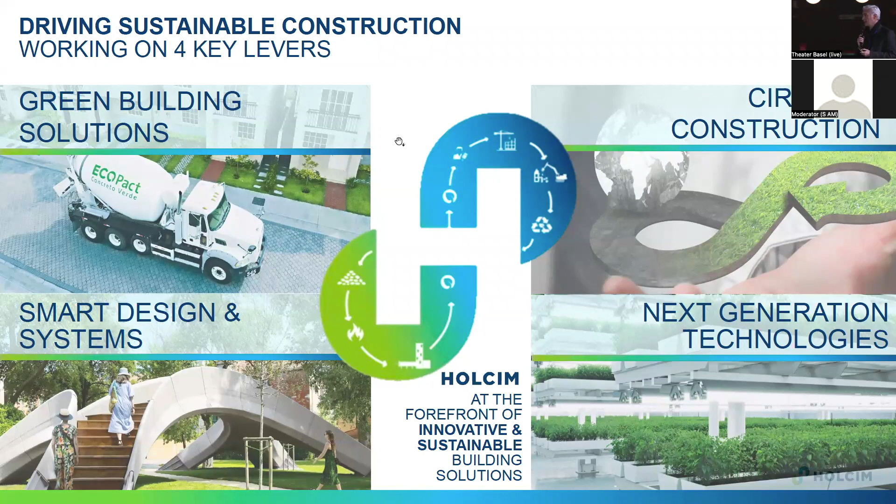And I will come back to that. Smart design and systems - we need to change the way we think and design buildings in order to adapt and face the four facts we already mentioned. And next generation technologies - we need to adapt and take into consideration the way we are extracting data, generating data, and extrapolating and modeling the way we build. So I would like to spend a few minutes on each of the four pillars I'm mentioning here.

The first one is green building - low carbon solutions on cement and concrete. We need to redesign and rethink the way we produce cement. We need to replace the clinker, which is a raw material for cement production, so we need to minimize the use of clinker in the cement formulation.

And then we need to use alternatives, be it slag, fly ashes, pozzolan, or other natural resources or waste materials that exist today and are to be used anyway for cement production. I'm just mentioning two products launched by the Holcim group, which is leading in this green solution, providing a broad range of green cement and concrete with CO2 decarbonization ranging from 30% to 100%. That's our way to decarbonize the cement and concrete industry.

Products that have already been used - we are not inventing something for tomorrow, we are already using these products today. A few examples: in Seattle with the Spheres, very iconic, very beautiful, with a reduction of CO2 of 80%. That's a building done for Amazon, and it's quite nice. It's very iconic, leaving freedom for architects to think differently and make something very nice and cool with concrete.

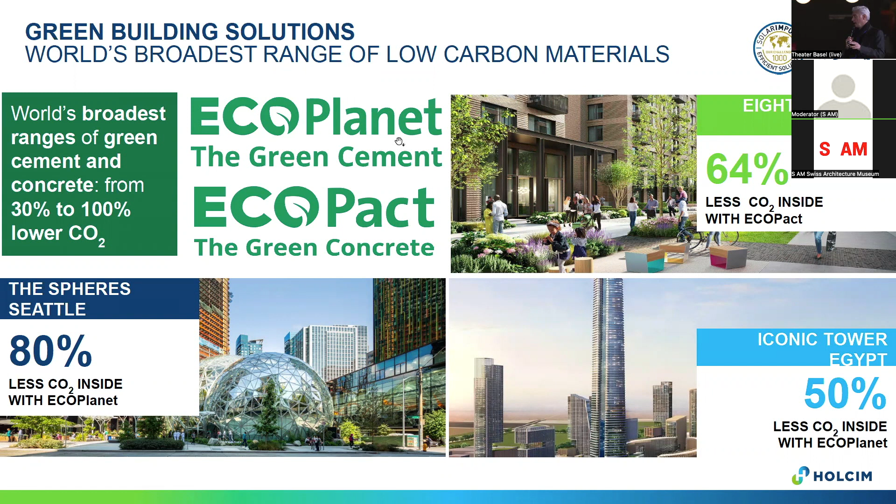The second lever I mentioned is very much about circular construction. We are all generating a lot of waste everywhere, and we need to get rid of it. Today, the cement and concrete industries can cope with this waste, either using it as an alternative fuel or reusing it in our own products. Concrete demolition waste is recyclable - we recycle it by using it as raw material for the cement industry or concrete industry, simply reusing it as recycled aggregate.

The best example we have today is in Switzerland, in Zurich, with the Susteno brand - a cement containing 20% recycled aggregates, crushed and made part of the cement together with the raw material, the clinker, that I mentioned before. That's unique - something that doesn't exist anywhere else in the group. We started with the Swiss model, and we're now replicating this Susteno brand with concrete demolition waste all over Europe and then the rest of the world.

Other examples: digital material management, making sure the available information about recycled aggregates and concrete demolition waste is well known by all users, so they can easily access this material. Advanced crushing technology - imagine that tomorrow, instead of just having recycled aggregate, we can separate the aggregate, the paste, and the cement. Then you can have better access to sand, and we know sand is scarce in some areas. We can get very clean aggregate, replacing natural resources and conventional aggregates.

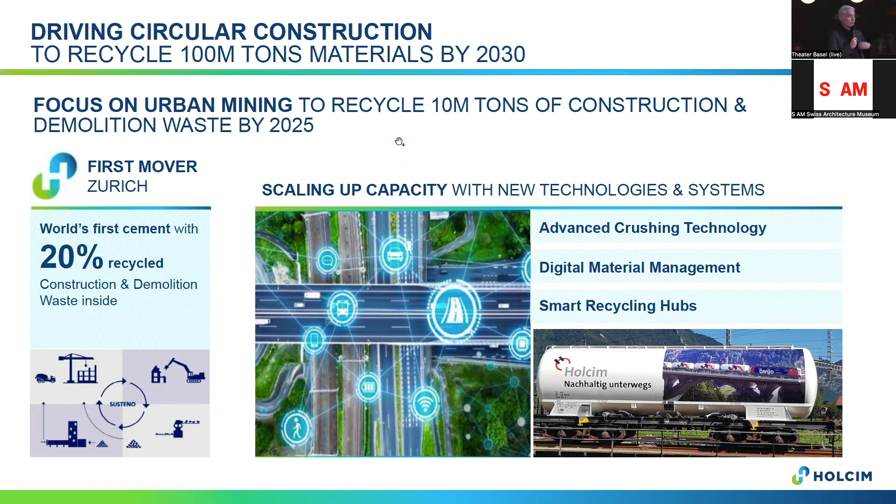Smart recycling hubs are about how to get access to these recycled aggregates more easily and make them available for everyone. This is a key trend, with an objective to reach 100 million tons by 2030. Among those 100 million tons, we want 10 million tons to be concrete demolition waste reused in our industry as recycled aggregate or material for cement.

Obviously, making products low carbon is a solution, but having a design that by definition uses less material, with material at the right place and the right composition, is extremely important. That's what we did with the Striatus bridge, exhibited at the Biennale in Venezia, Italy - a bridge made of 53 blocks, all different, designed and produced by 3D printing, empty inside. That's a wall, and then they all combine - not glued, but just combined together by gravity - which makes them extremely unique, recyclable, dismantleable.

And reusable again. So, having by design this spirit of already anticipating that it will either be reused and dismantled, or recycled, optimizing the use of material over its life. The second example is the lightweight floor system that Philippe knows extremely well, which simply puts the material at the right place and not more.

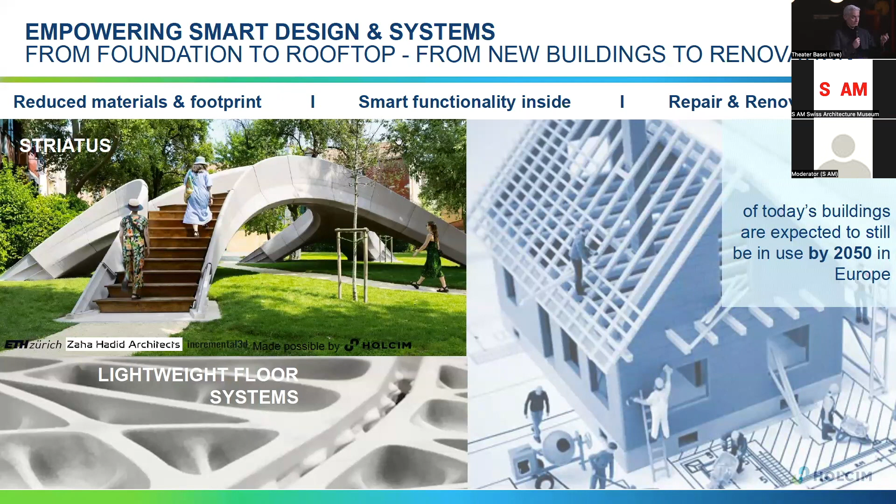Obviously, repairing and renovating is the best way to lower the carbon footprint - not to demolish and rebuild, but to avoid demolition and extend the shelf life of a structure by renovating. We know that 80% of the buildings built today will still exist by 2050, so renovation and repairing will be a key part of how we lower carbon emissions by avoiding new construction.

The fourth pillar is new generation technologies - how can we define new ways of avoiding CO2 emissions by making sure the CO2 at the chimney of the cement plant is captured rather than emitted. That's what we call CCUS: carbon capture, utilization, and storage - how can I reuse the CO2 emitted from my chimney into something new, not just avoiding emitting it into the air, but reusing it for synthetic fuel production, or even crop growth in vertical farming, as we do in Andalusia, Spain. How can I make use of the CO2 emitted from my chimney to produce something, instead of just letting it go into the clouds?

Timber Roc is a perfect combination of wood, taking the benefits of wood combined with cement - using cheap wood to replace the aggregates, combining these cheap woods with cement to make a new kind of concrete, which is carbon negative first, and leads to the same functionalities as a conventional wall.

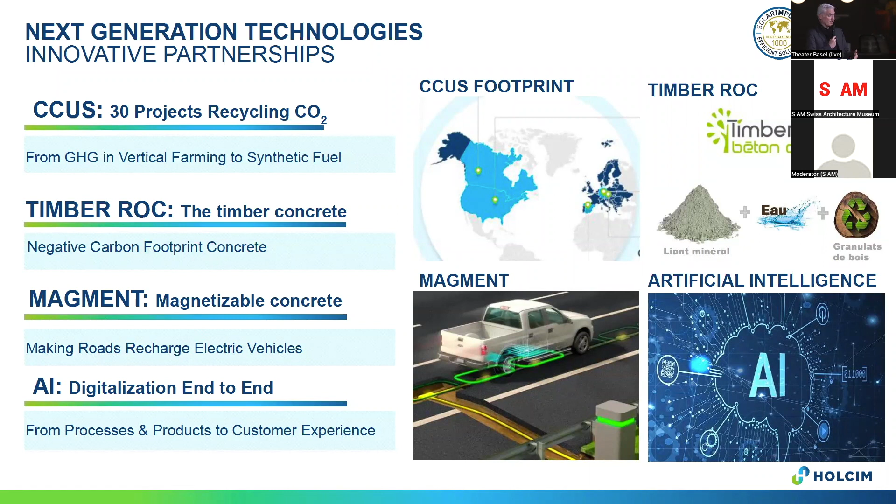And the last one, artificial intelligence. We're generating a lot of data, you are generating a lot of data - how can we extract the most from this data in order to generate lower carbon production, a process of making cement, a process of making concrete, a prediction or modeling of the performance of concrete by using all this data. That's the key challenge for the coming years, and we really need to be ready for that.

Obviously, we want to lead this industry to the net zero transition. We have to be prepared for all the areas of application where concrete is absolutely needed - be it for housing for all, making houses with a lower embodied carbon footprint, or green infrastructure. Here you can see a fantastic example of reefs of bioconcrete, made with 3D printing, that will be placed in the sea and will restore the fauna and flora in the maritime environment.

Industrially, we're building a lot of industrial facilities worldwide, be it logistics or energy systems, and we really need to answer to these needs. And obviously circular cities - making sure we are improving the way we define the circular dimension of every single city that is built.

So all in all, the message here - and I will be extremely happy if at the end of this presentation you keep this in mind - is that we are building and leading the industry towards a net zero transition, a transition that has to be known first by you, because you will be deciding the way you want to build. You have to remember that low carbon solutions are not something for the future - that's something which already exists. We have to make it aware - this is our job. We're making that aware with events like this one, just to have you consider that concrete is not something from the past, but we're moving to something which is low carbon and, in the future, absolutely net zero.

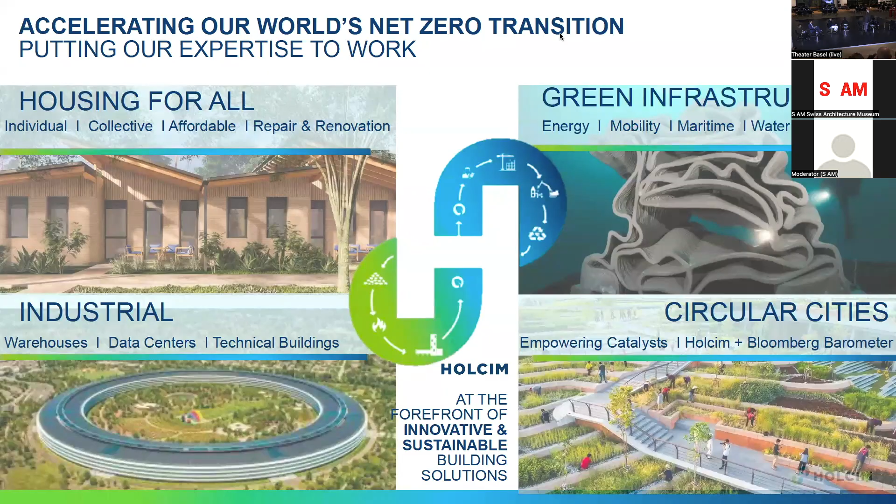All right, thanks for this opportunity. Sorry for bombing the program, but after we talked, Andreas, you said it sounds like you have to present as well - so thanks for that. All right.

All right, I will be talking about rethinking concrete construction, and more specifically, I want to demonstrate what you can achieve by strength through geometry and also by material effectiveness. I'm not talking about material efficiency, so you will see that this is different.

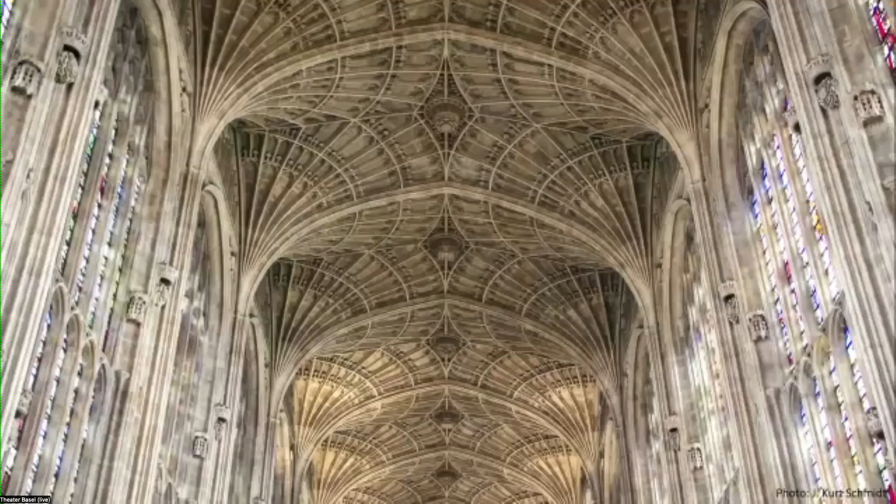My work starts by researching historic structures, and the more you actually look at them, you're entirely blown away that modern day tools can barely understand, explain, or design how and why these beautiful structures still stand, particularly when you realize that they're proportionally as thin as an eggshell.

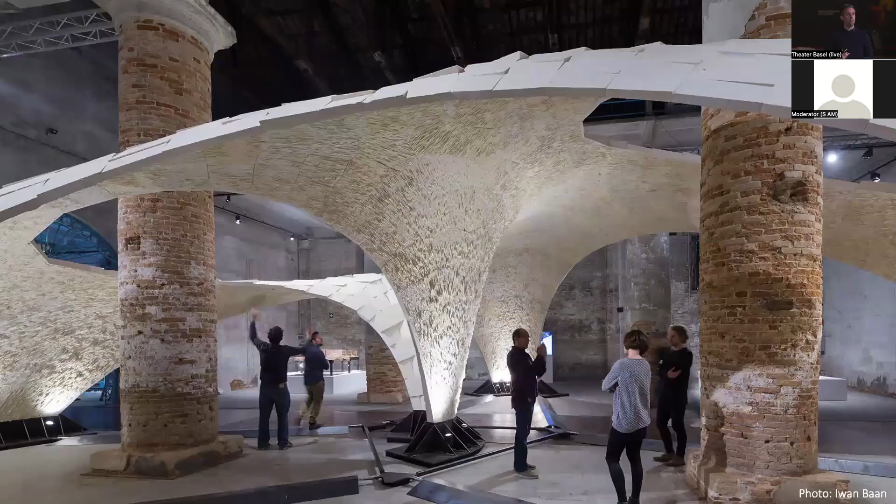So in order to share that message, in 2016 we tried to shake the community a bit, our profession, to show such a structure: 399 cut stone pieces held together by geometry. They get strength through their geometry. There is no glue, no mortar, no reinforcement.

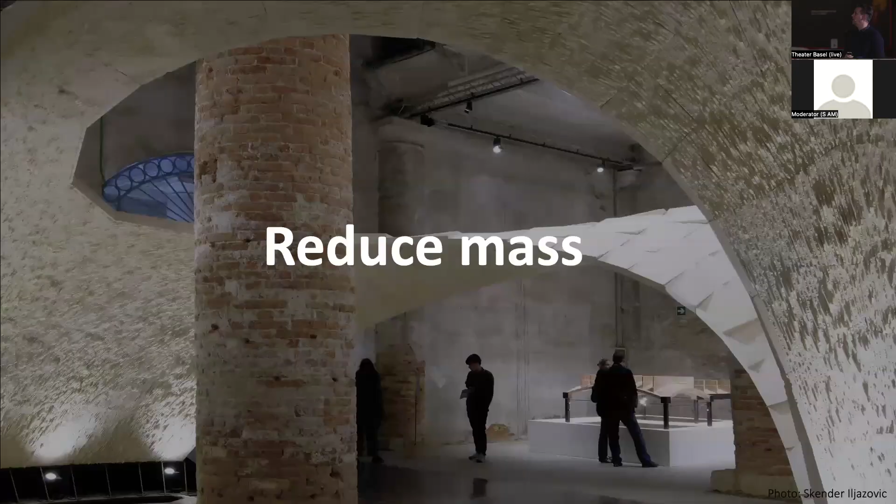So this extremely thin sheet of stone, why I showed you this project, you will see this all come together later. But the key thing is that by reintroducing good structural geometry, you can reduce mass.

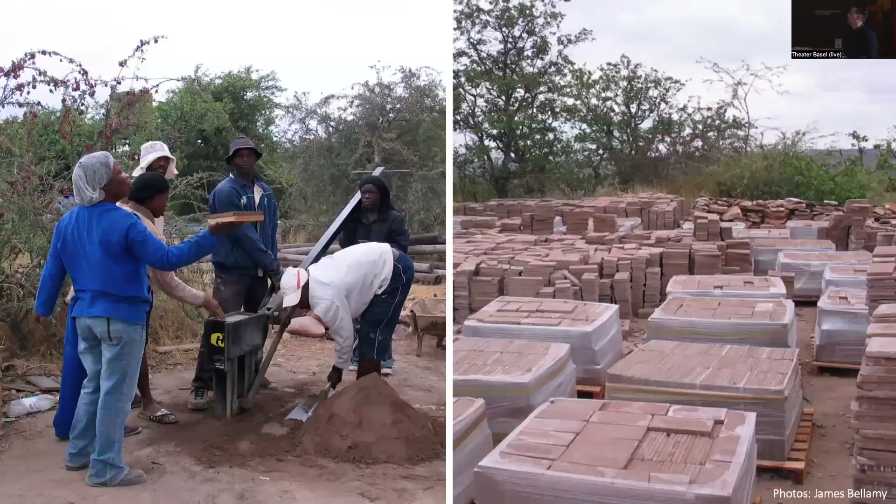Another old project that I was lucky to be involved with is the Interpretive Center in Mapungubwe, South Africa. What is special here is another advantage of getting the geometry right. We used extremely weak materials, so weak that they had to be brought on site in very small packages, or you could just break these elements.

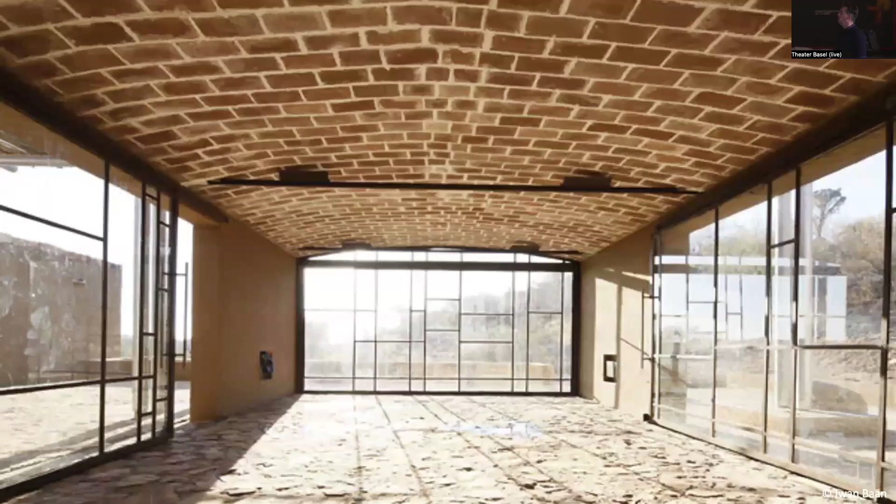But if you see on the left, if you place these weak, non-structural materials where the forces want to go, like people historically understood, then it's a perfectly safe structure that carries the floor still today.

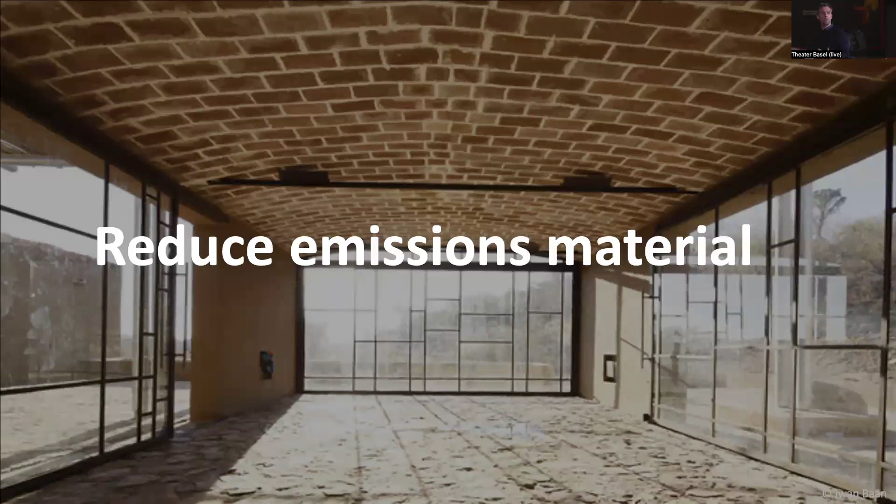So the key message here is that you not only can reduce the volume, but also reduce the stresses. And there is almost a one-to-one relationship between how much you're asking from a material and how polluting it is. So that is the important message here.

So we heard about this. We have quite a challenge as a profession ahead of us, a gigantic world population increase. Typically, you hear about the equivalent of building one New York City every month for the next 40 years. Another calculation is that we are expected to build about 200 billion square meters of floor area in those next years.

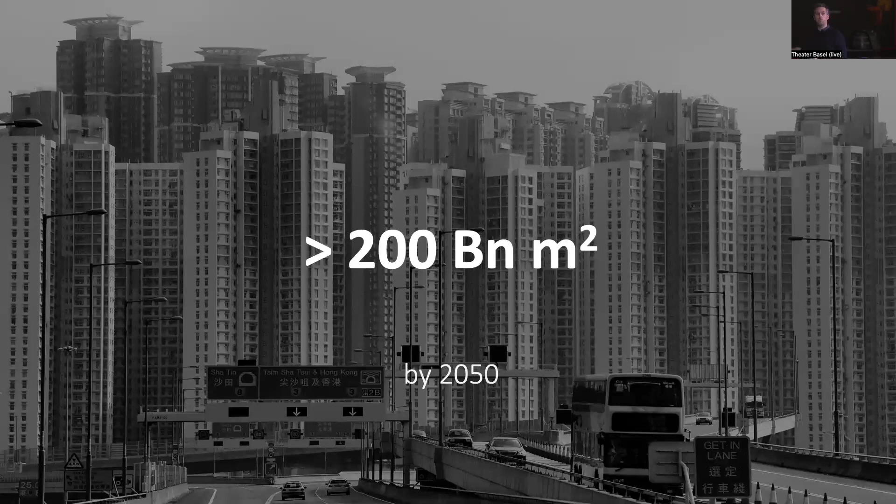So looking at these buildings, we most likely will densify. We will go a little bit higher. I'm not suggesting that this is the future, but let's take any of these buildings.

What is remarkable, if you look at medium high-rises, is that three-quarters of the mass of those buildings is in the structure. A totally crazy situation—the structure is mainly there to keep itself up.

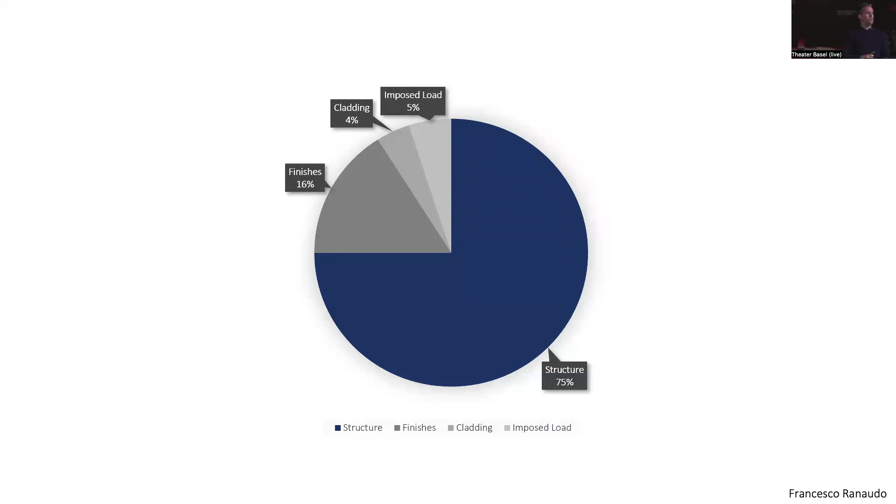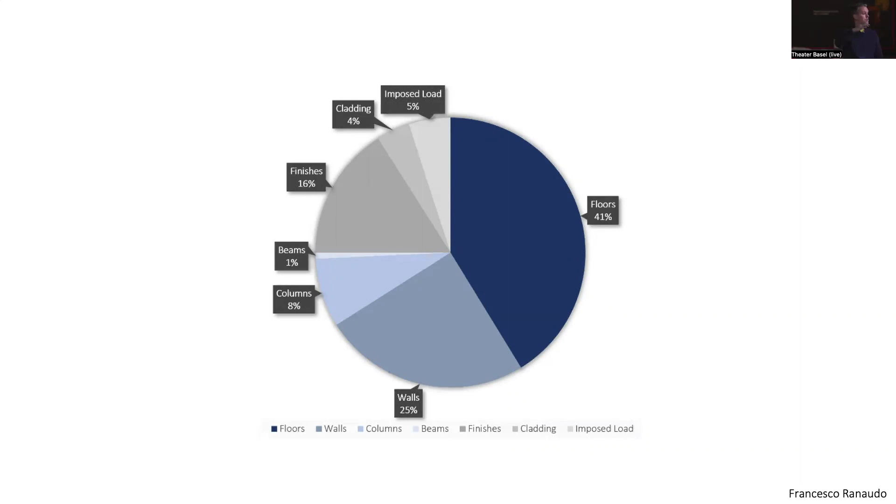And if you then zoom in a little bit more, you see that actually more than half of that structural mass is in the floors. So spanning space, providing the most banal thing to walk on that we all need in buildings, is actually the most material-intensive component.

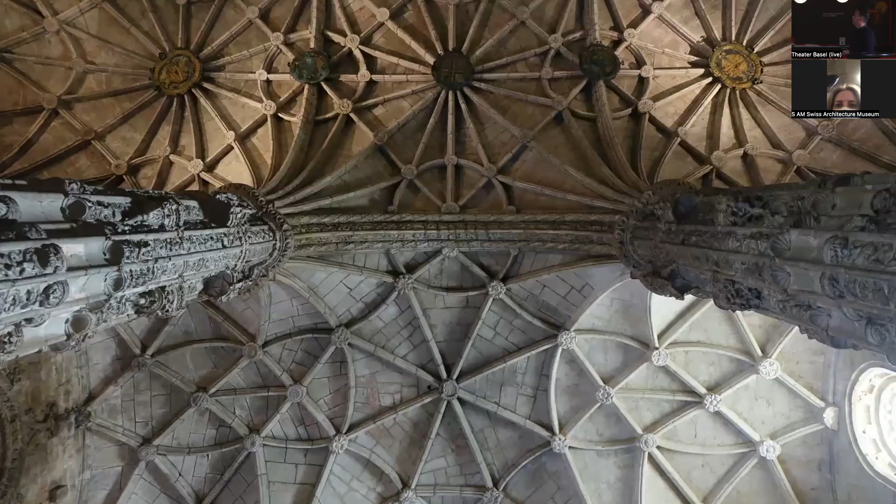That is why we are now recently translating these ideas to address this big challenge. Can we do something better? You probably can imagine where this is going.

I consider concrete—so we also need to distinguish concrete versus reinforced concrete—but concrete is like an artificial stone. Stone is happy in compression, not in tension. That is why these structures are all vaulted arches and so on.

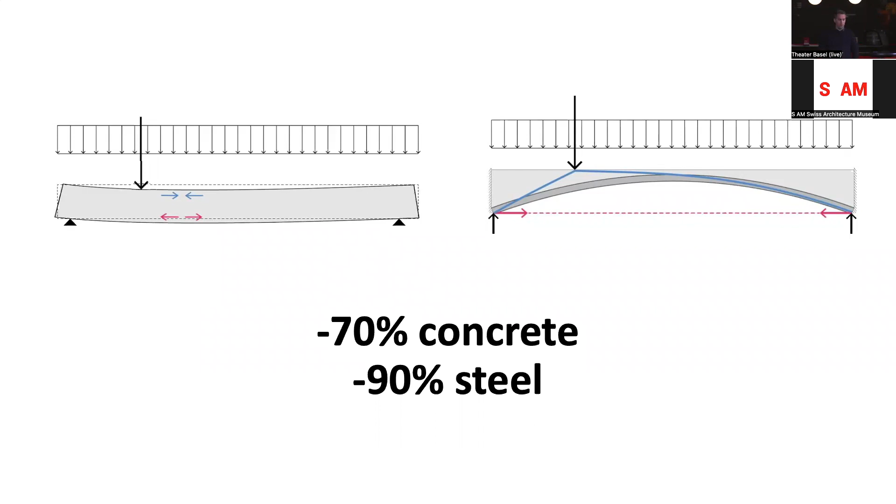So indeed, if you reintroduce the stiffened arch with a tension tie, rather than pushing a material into a geometry it absolutely does not want to be, like a straight beam or floor plate, then for free—just by bringing back old, known principles that have stood the test of time—you get 70% less concrete and 90% less reinforcement steel.

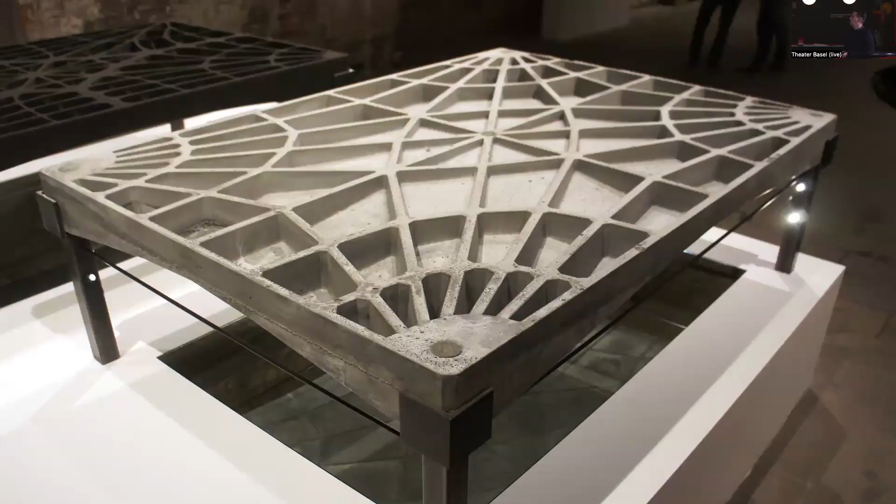So we thought, okay, great. Can we then modernize this rather than just using these simple arches? So we made a 3-dimensional floor plate that we also already showed in 2016. The same idea: the vault is there to carry the weight very evenly, like an Isler shell, very optimal, and will stand for thousands of years. And then the stiffeners are basically there for live load cases.

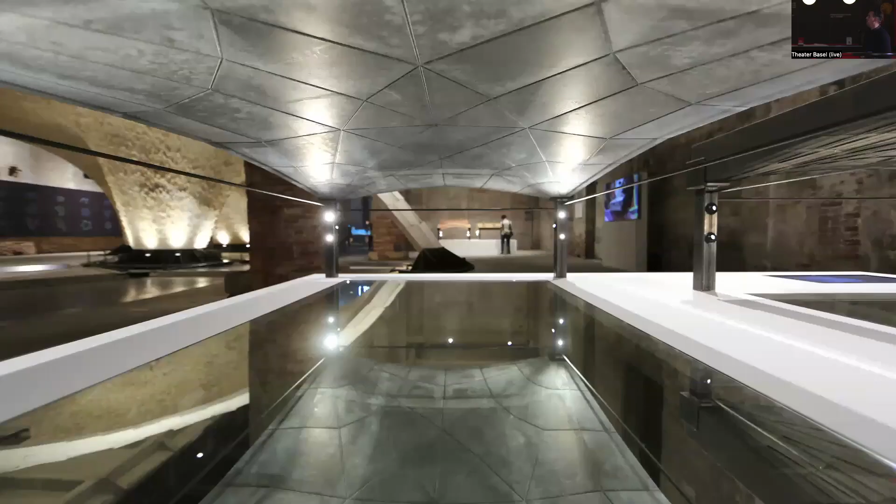So here's some images of some early prototypes. This is the very first one we did, in 2011, that we then broke just to show how thin this unreinforced concrete floor plate is indeed.

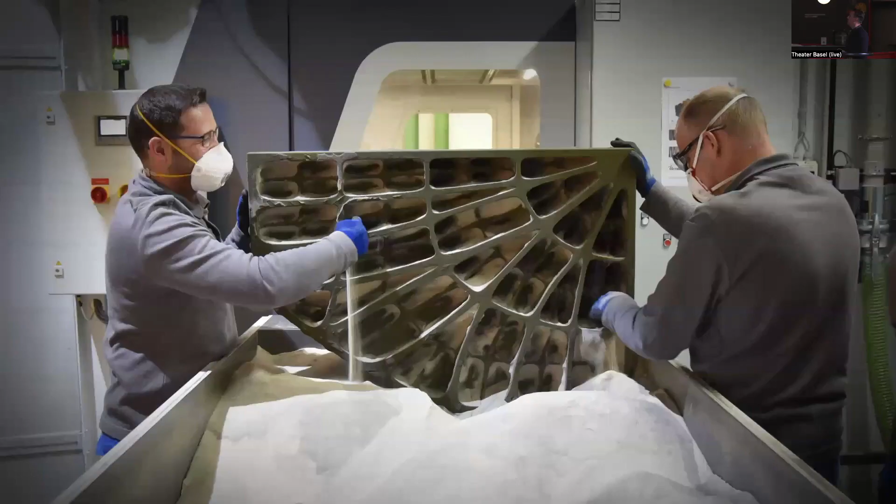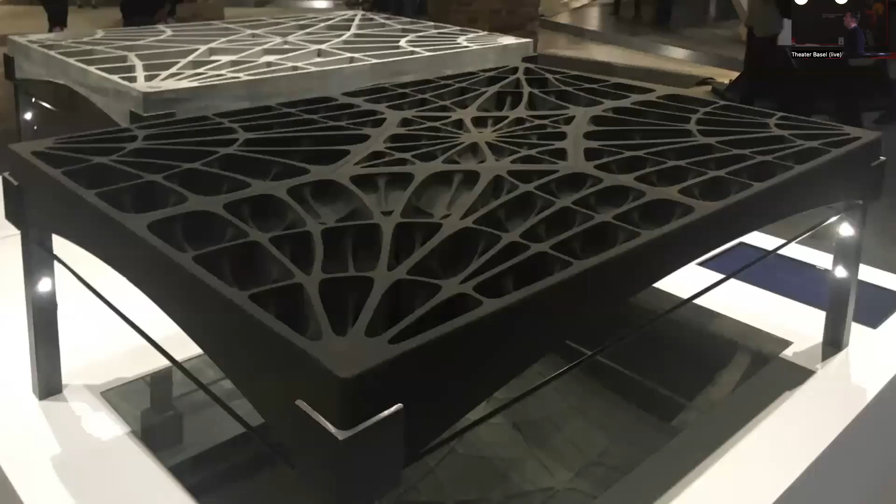In order to—again, I've now spent almost 10 years trying to convince many skeptics that reintroducing old knowledge actually makes sense—we do extreme things like this: 3D printing a floor with a super weak material that, again, you can break as easily as cold, dark chocolate in your hands.

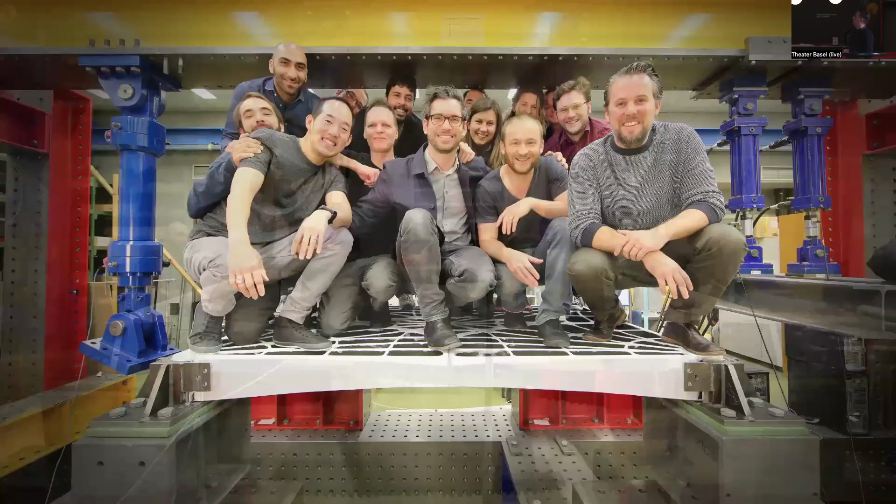So we do all the required tests, and then, as any engineer, you want to go stand on your structure. So this is 1,200 kilograms of ETH nerds standing on a 2-centimeter super weak floor that is nicely stable.

If you think that this is very academic and crazy, unreinforced concrete today is not possible, then maybe you should go to the Oyster Bar in Grand Central Terminal in New York. These structures have the same thickness, proportionally the same weak materials, and they're carrying the Vanderbilt Hall on top. So if you think I'm crazy by proposing these super lightweight, unreinforced structures, then we should warn the millions of New Yorkers going to work every single day that they're in danger of their life.

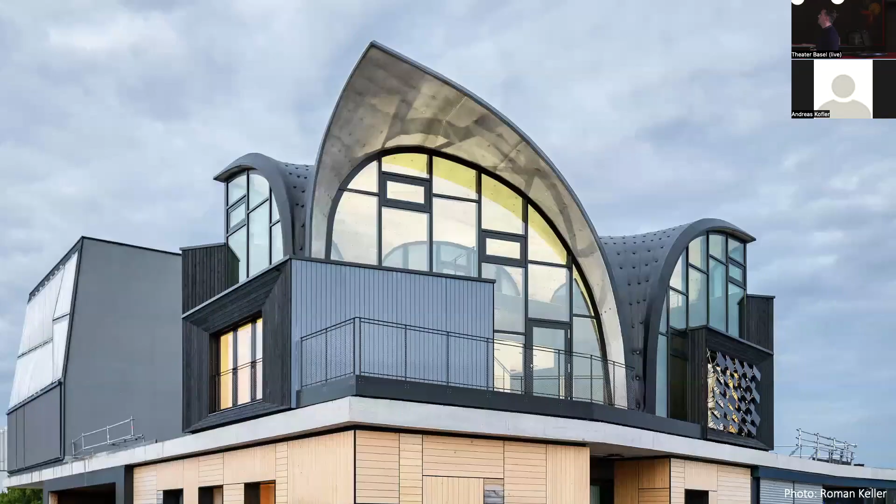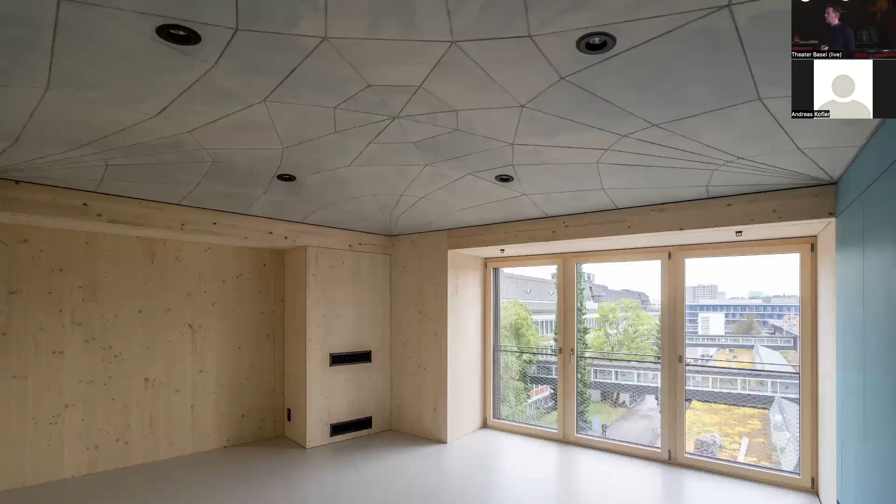You might have seen this absolutely crazy thing, the HiLo project, the last thing we finished. The roof is there to shout and make you pay attention. We did something special with the roof too, but the key message is the floors. This is the first time in a real, approved, engineered project that we built such a floor, an unreinforced, super lightweight floor that for the 5 by 5 meter span has only 3 centimeters of unreinforced concrete plus these stiffeners on top.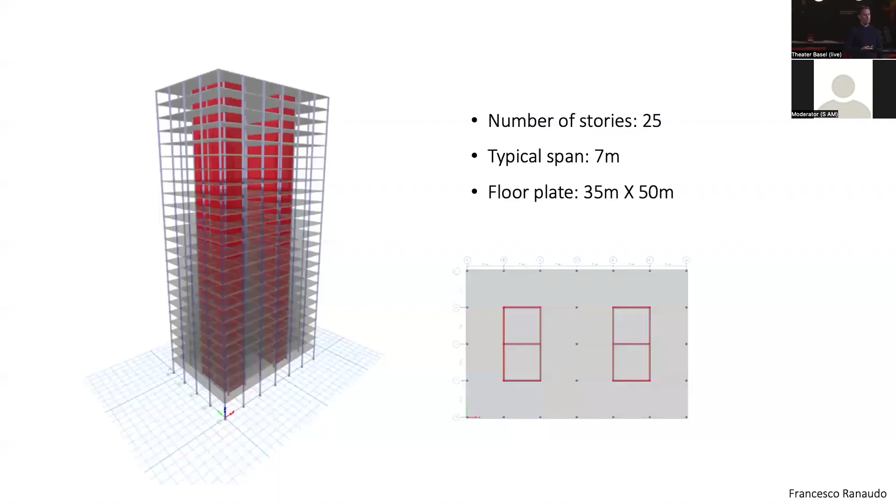So I show this because I know what the outlook could be. If we go back to these structures and take any of these medium high-rises of roughly 25 stories, and do a simple case study combining the two aspects I already talked about, that 40% is in the floor and the savings on the right, those paying attention will notice it's no longer 70 and 90% because we're talking about a building with higher fire regulation requirements, so we need to compensate for that a bit. Still, those are some pretty nice savings to be gotten.

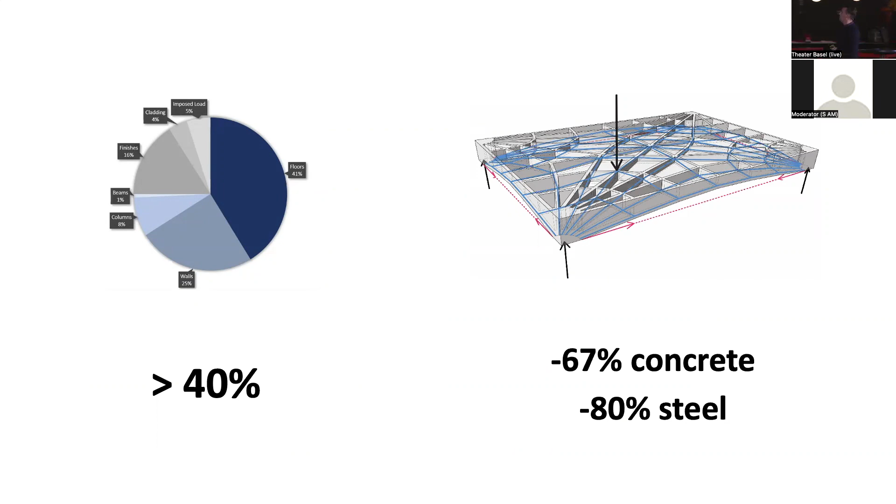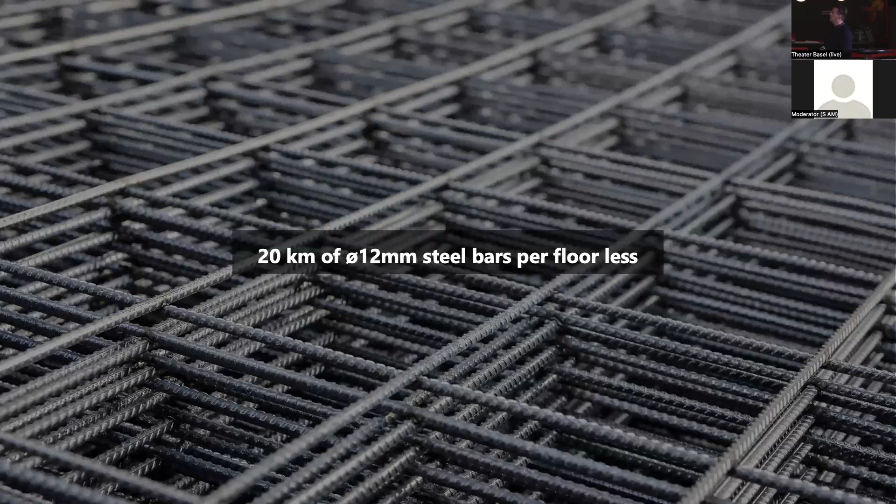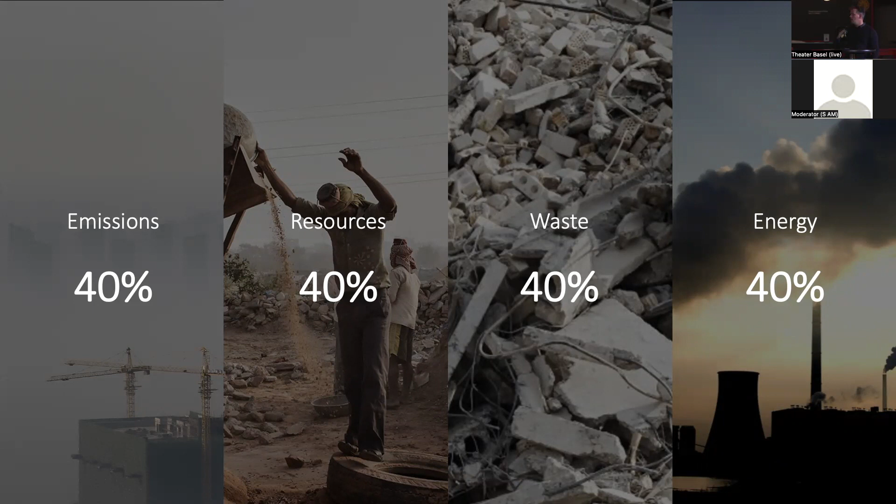Okay, but what really matters is not lighter, less material, and so on, so we need to get past that. What we really need to address is these extremely painful statistics, what we are responsible for globally: 40% of emissions, resources, waste, and also energy use. So let's talk about the gray elephant in the room, this most destructive material on Earth.

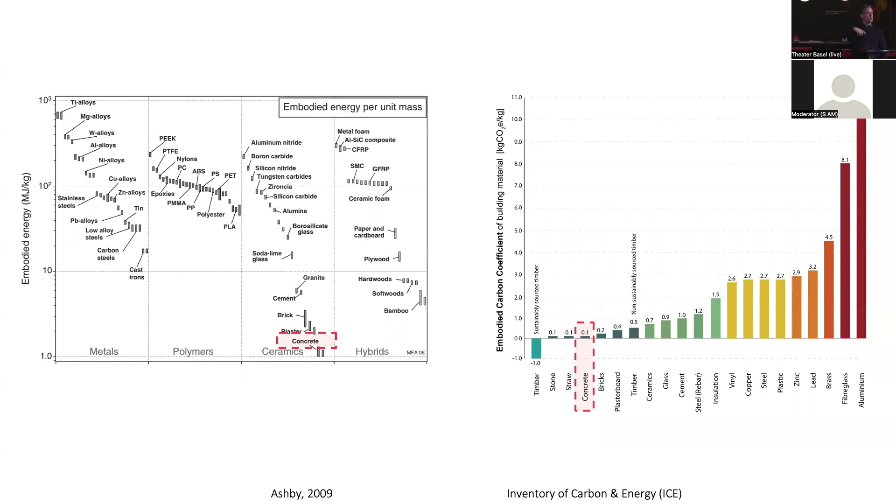Everyone seems to agree that this material is extremely bad, but is that really the right statement? Is it really a question about material? Many researchers before me have demonstrated that concrete is not a bad material when you look at the energy, or the embodied carbon coefficient, the emissions associated with it. That's what really matters. On the left, the only material you cannot touch is sustainably sourced timber, and then we probably need a discussion about what it means to provide timber at the scale needed to still provide adequate housing globally, what it means to keep it sustainable, and what it means to not lose all the benefits of timber at end of lifetime when you trash it.

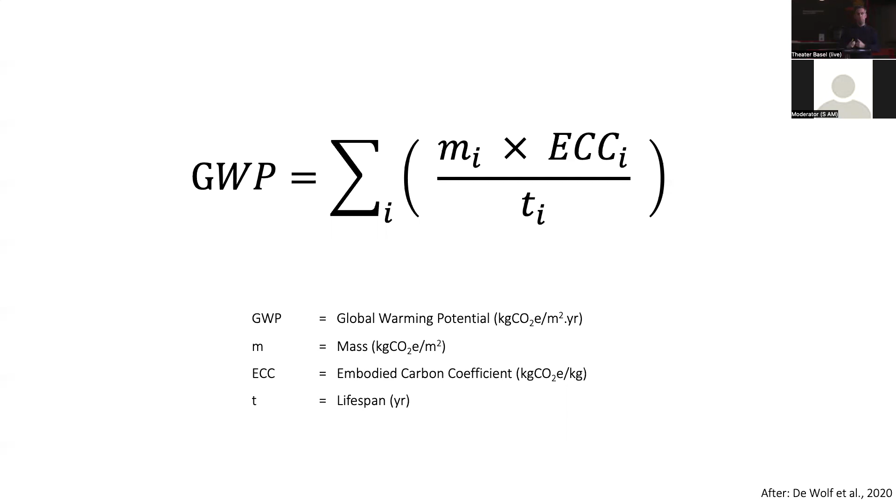All right, so this is what matters. It's one equation, but I think it's pretty cool. It basically says what really matters when you look at embodied emissions. This equation was first written by Catherine de Wolf, a new colleague at ETH. She says you want to take all the parts in your building: first there's the mass, how much material you're using, then the ECC, the embodied carbon coefficient, how polluting that material is, and recently also the time scale was added, but I'll talk about that later. So here, going back to the floor.

Okay, this is going to be a little too much, but I wanted to show you this slideshow. It shows that if you only innovate on the material, because you also have the steel and other aspects to your structure, you actually save 30, maybe 40% of emissions.

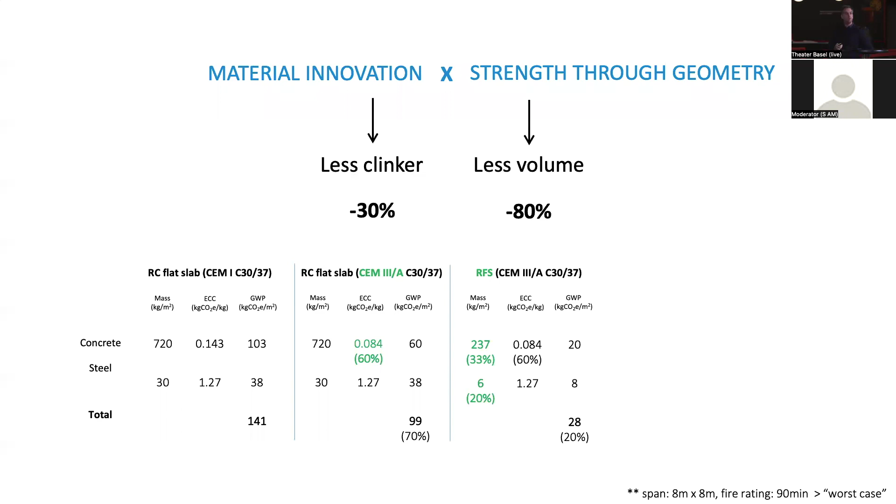But if you introduce strength through geometry, you get two benefits at the same time. Remember the Venice project, the crazy stone vault, less volume gives you 80% savings right there. And if you also reduce stresses, you add that up to 85% because you use a lower strength material. So with today's fully engineered solution, we built it already once and we're now developing it to deploy at scale.

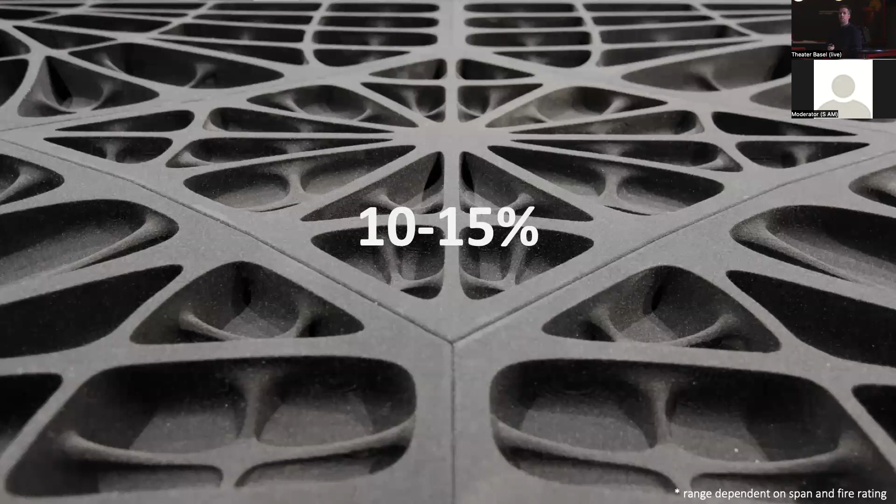We already have a solution that is 10 to 15% of the equivalent embodied emissions of a floor plate. Looking at this image again, realizing that 40% of all the mass in this building is in the floors, this is really something to go for.

I had, of course, 100 more slides. I might want to stop here. Yeah, probably. Okay.

What's that? The cable. Does this work? Okay, yeah.

So yeah, thank you so much. Since we talked about the white elephant, I think I will continue on this a little bit. I simply put together a couple of facts that might be helpful for our discussion tonight and how we can address these facts, and a couple of them were mentioned already. I think the status quo is also clear.

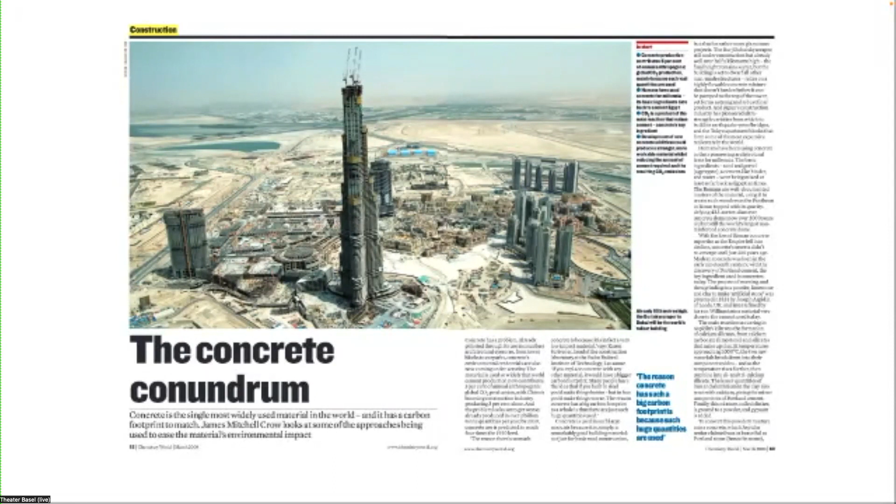We live right now what is called the concrete conundrum. Karen Scrivener, a colleague from EPFL, states that more than 50% of all man-made objects in our world are in one way or another connected to cement. That means we have gigantic masses, of course.

I'm sure you know this figure, done by the Bill Gates Foundation in 2014, that China in three years between 2011 and 2013 used 1.5 times the amount of concrete than the US did in the whole 20th century. So we have to understand the scale of this, and I will come back to this important figure.

And then, of course, we have a couple of problems we have to address. This one here from a Swiss newspaper, the Tagesanzeiger, with the headline 'The sand is running out,' addressing a global issue, here Singapore as a case study. The same is true for where I live in Germany - Deutschland geht der Sand aus - and I could mention Austria, I could mention all of Central Europe. Apparently we are running out of sand as a reserve.

I think that's an important distinction we have to make. We have enough resources, but we understand the reserves as that part of the resource that is technically, economically, ecologically, and ethically able to be sourced out of our natural environment.

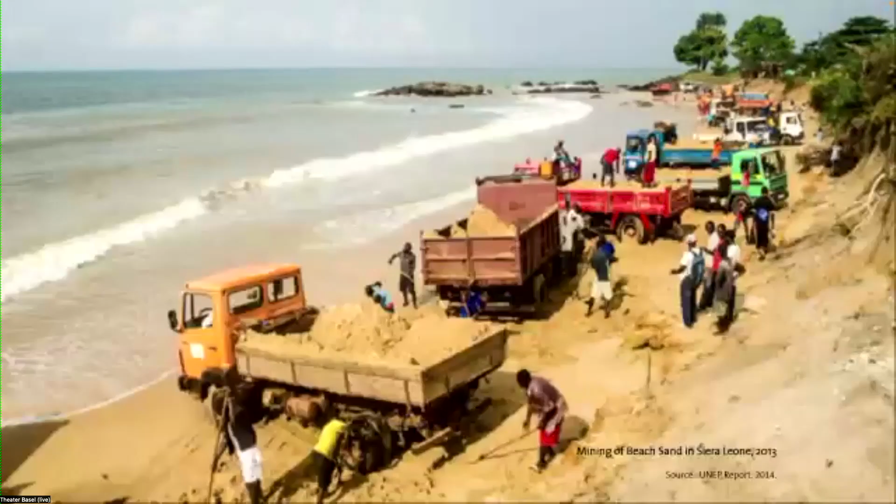And then we know all these stories - this one an example of Sierra Leone, but also Morocco, claimed to have lost already 50% of all their beaches. Sand is a natural material which comes out of mountain ranges through erosion. It's washed into streams and rivers and then washed over 350 million years onto our shorelines. In the last 150 years, we've managed to take that 350 million years of erosion material out of these places because our hunger for concrete is immense.

Philip mentioned already that the building industry at large is responsible for 40% of our CO2 and greenhouse emissions. It's also known, I think Andreas mentioned at the beginning, that the cement industry is responsible for between 4 and 8% of global CO2 emissions.

I don't have to mention that these emissions have impact, that we're living in a time we consider a crisis. That hasn't always been the case - it's interesting in the exhibition, where it stops in the 1980s-90s, that fact wasn't there yet. I think that knowledge we have today, looking back, gave maybe a freedom to the industry and to architecture that you talked about before, which today is maybe not given.

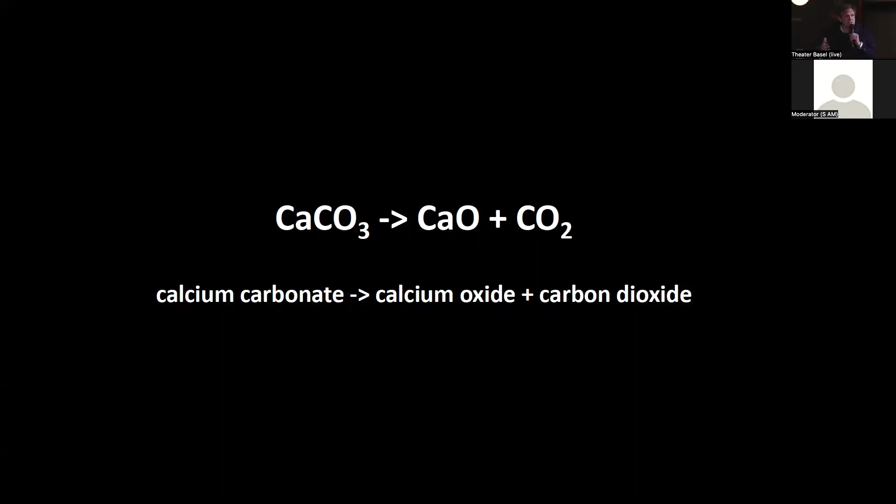The question is, how do we get rid of the emissions? The second part is a chemical reaction, turning calcium carbonate into calcium oxide and carbon dioxide. That is a chemical process—it's inherent, and the more cement we produce, the more CO2 is emitted.

Now, what are our ways out of that? When we discuss sustainable construction or sustainability at large, there are three methods or scenarios we usually look at. The first one is efficiency. Efficiency could be described as making the existing system better.

Let's say we have a combustion engine in our car, and maybe in the 1980s that engine used 8 liters per 100 kilometers. Today we are able to build an engine that uses only 3 liters of gas to run 100 kilometers. Philip addressed part of this efficiency or effectiveness discussion—basically, how much material do we use to reach the same effect? That is a very important discussion, and that is one solution.

I fully agree with Philip what he just said, that even in the end, if we reach only 15%, or we can save 85%, to reach the other 15% with other strategies might be much easier.

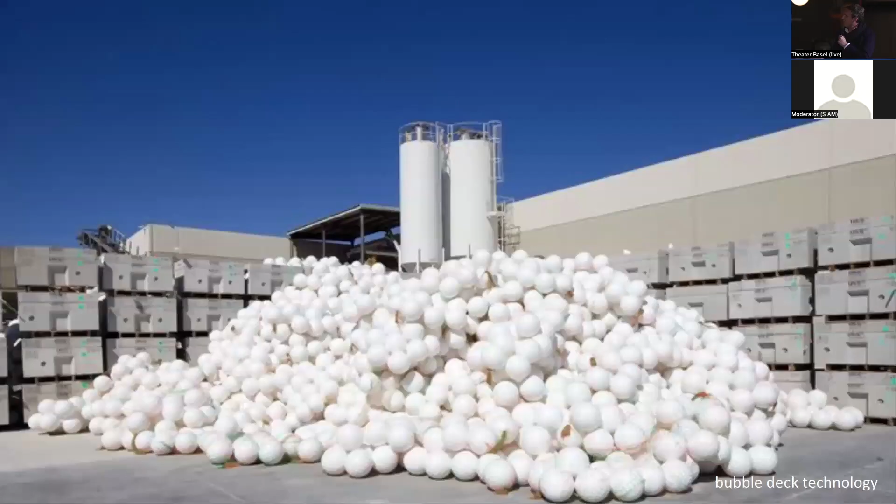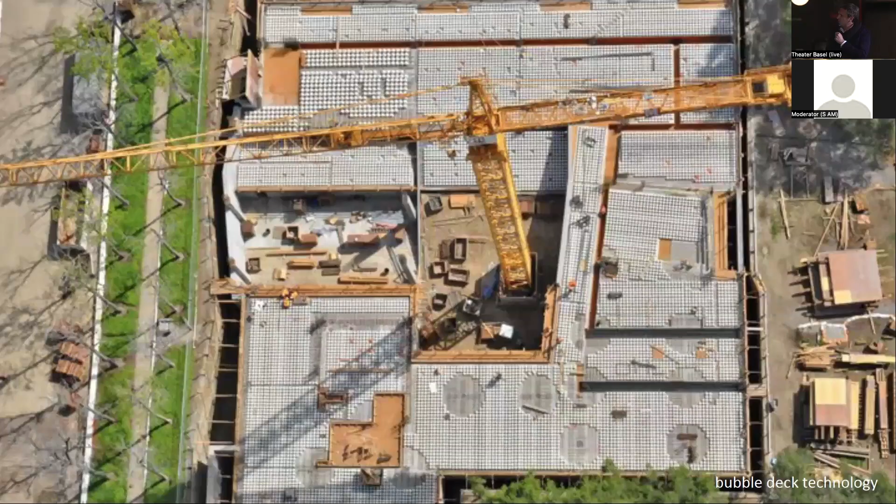The second strategy is sufficiency, which basically translates into the idea of using less. Whatever we do, we should think and talk about how to use less, for example, of concrete. We know these technologies, like bubble deck technologies, where you put balls into the concrete slabs to save material. That is one strategy, or what we heard today already—using a lot of aggregates coming from a recycling stream, so we don't have to use as much natural sand and gravel. That is a sufficiency strategy that we should definitely pursue and research more.

Then there's the third strategy, which is called consistency. Consistency means that we understand our natural environment as an encircling, encircled operating system, with the human being part of that circular system. Consistency means that whatever we do and how we act should be in line with this circular system.

Now looking at the two main problems we have—maybe you know this gentleman, Mr. Schellnhuber, who was the former head of the Potsdam Klimafolgenforschungsinstitut. I think it was 2 or 3 years ago he came up with a statement that we should simply not use concrete anymore because of the effects I just described. But, and I think it's a very nice graph that he shows in a paper published in Nature, the buildings, the built environment should act as a global carbon sink.

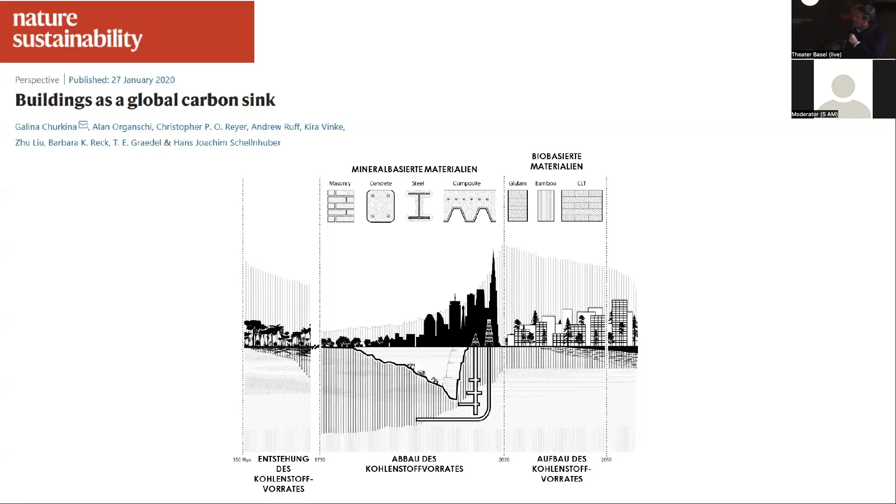What he claims is that as of now, we have to go back and build again a carbon storage. His proposal was what he calls the Waldbaupumpe, the forest building pump, using the built environment and one of the most powerful natural cycles on our planet, photosynthesis. He talks about trees and forests, but you could imagine any growing organism on this planet using that pump to get carbon out of the atmosphere and put it back, in this case, into our built environment.

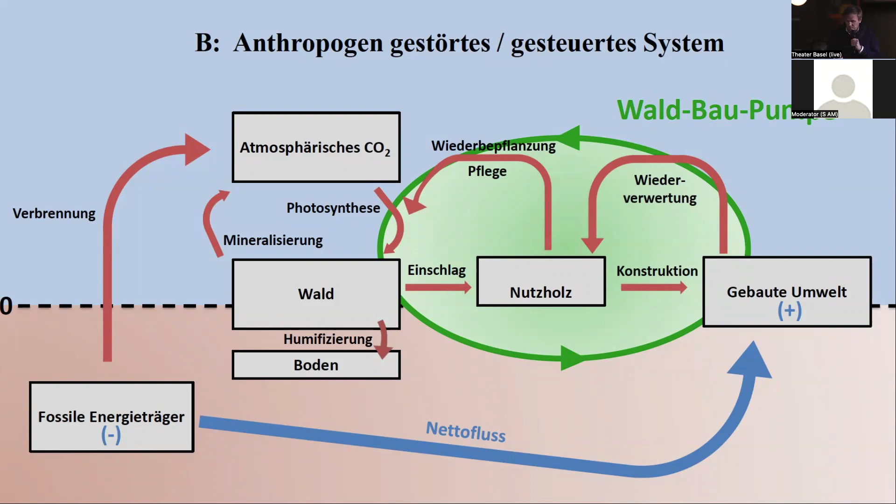There are a lot of questions with this. Do we even have enough resources for that? Is there enough wood available? Is there enough natural material available to do this? I think that's all questionable, but it's an important point to discuss, understanding the mechanism—and that's why I'm using this example in terms of consistency—using natural circular systems to take care of our CO2 problem.

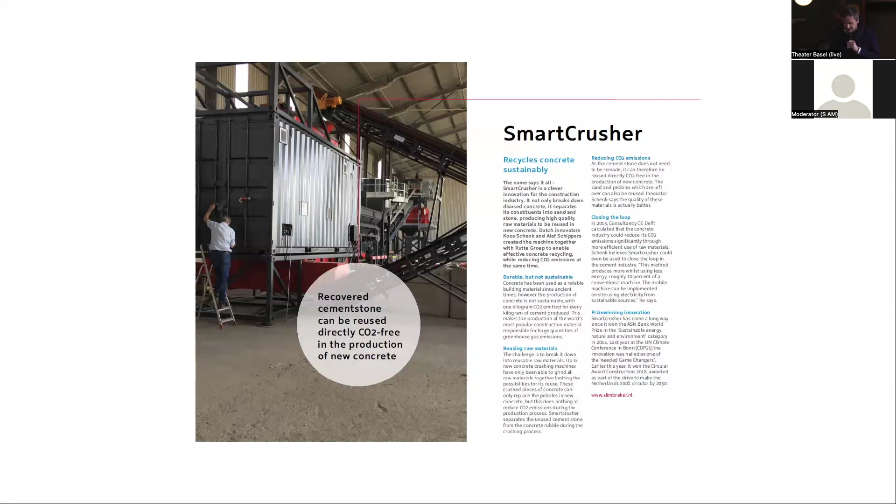There are solutions already for using these materials that we've put in our built environment. There's a company in the Netherlands called SmartCrusher. What's interesting is they don't just recycle the concrete, but with this technology they developed, out of concrete they can actually extract the natural sand, the natural gravel, and the cementous parts, keeping the original quality of the material on the same level as the primary source.

That is a precondition for the circular economy—making sure we get all materials back into the circle in their natural, primary state, and not cascade them down, extending the dead end road. I think a lot of research and innovation will need to happen in future years to get that to a large scale.

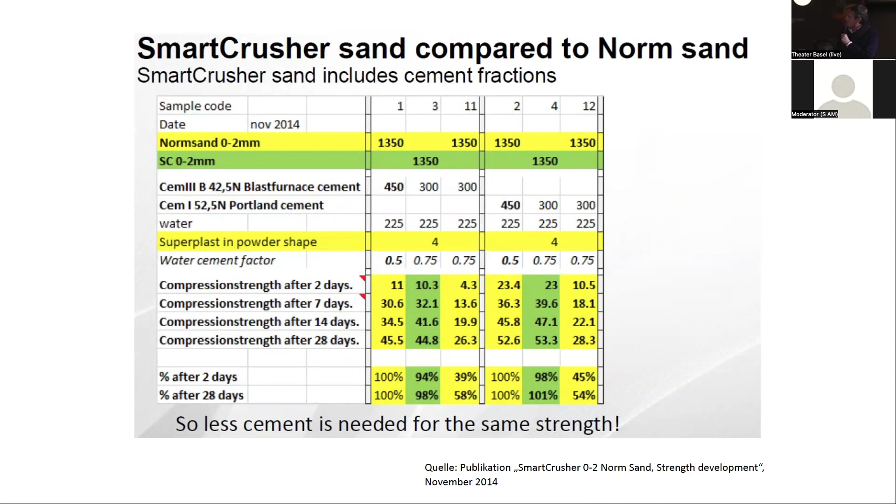Imagine the amount of material we've already put into our built environment over 200 years—using that as a new urban mine. I think the terminology urban mining applies here too. You can look at these numbers; they even say using these aggregates creates a stronger mixture of concrete. I don't know, but these are simply the facts.

Now, what do we do with the CO2? As I mentioned before with sufficiency and efficiency, of course we can emit less CO2 with new mixes and chemical mixes—all of that is possible. But what do we do with the other 15%? There are new technologies now called carbon capturing processes.

There's an interesting case study happening right now in Norway. At the cement factory, the CO2 is captured directly at the source. They liquefy it and put it onto ships. You see here the harbor of the cement factory, and the liquefied CO2 is brought to an area in Norway with a special geological formation, where it can be pumped back into the ground and stored.

Think of that pump of Schellnhuber. Here it's not the natural pump, the natural photosynthesis process, but a technology that also has to be investigated, and maybe it can help avoid even emitting the CO2 in cement factories in the first place.

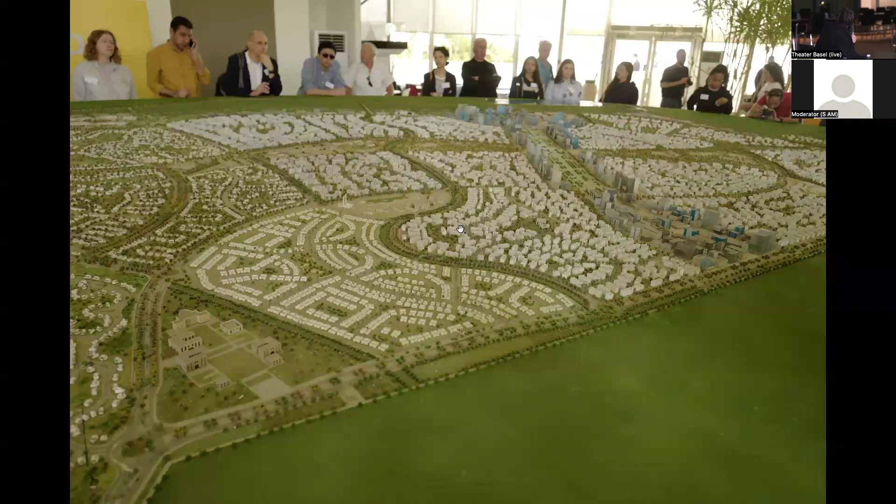And it's about things that happen with not us involved. These are pictures, by the way, from Egypt, when I was invited with some other people to be present at the Lafarge Holcim Forum for Sustainable Construction. And I was so shocked. The first picture was when I was finishing my lecture on the plane, and then all of a sudden I looked out and this is what I saw. That was really, for me - I'm not just talking about a personal experience - that really made me understand what the problem is. And we then also visited these structures from the ground, these cities and so on.

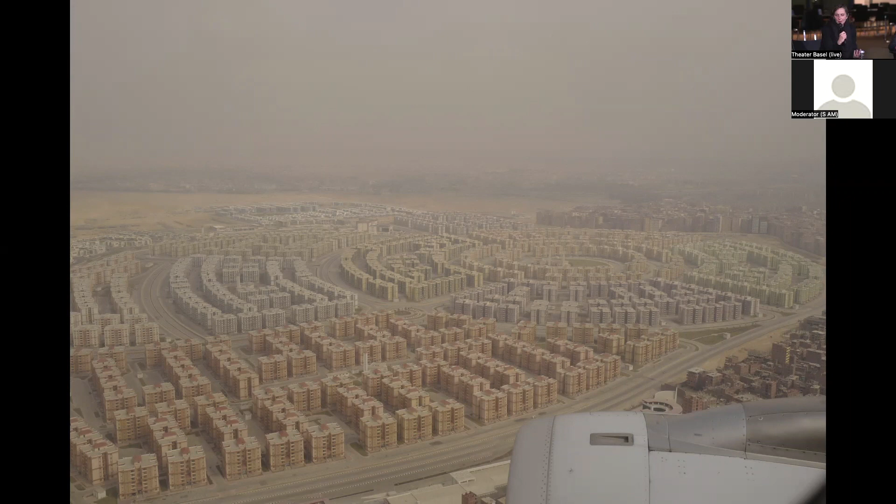So everything you can do to bring those technologies to these places, that's the only way to save the planet. I don't think it's about us doing a garage more or less. But to answer your question, of course we are trying to address the subject of the reduction of CO2 with every project. And in my view, it's going to lead to very differently looking buildings, and I'm looking forward to this - some of them are in the making. We start to really think differently. It's not about integration of systems anymore into slabs or walls etc. But I think many of these things have been said.

No, but what are the actual alternatives? So, for instance, are you trying to avoid concrete? No, at this point in time, we have to - not avoid, but reduce. And it's so interesting what Philip has been showing, and of course also what you have been showing. So the evening gives me a bit of hope, but we have to act right now. And so right now, yes, it's the kind of natural reaction: okay, can we do without? Or with only in the underground? And then the other thing, of course, is reuse on a big scale.

And we do have a couple of projects in our office where we try to convince people to reuse instead of build new. But what are the alternatives that you use if you try to avoid concrete? Give some examples.

Well, many things have been said. Of course, one is clay, one is wood, the natural kind of components. But we are also in a comfortable situation, and we can do buildings like the Ricola warehouse because we have a client that is aware, and that this is all wonderful, really. I'm obviously happy that there are these possibilities, but we are in an extremely privileged situation, and of course we are models to a certain number of people, but not to the people who built those things we saw on the screen.

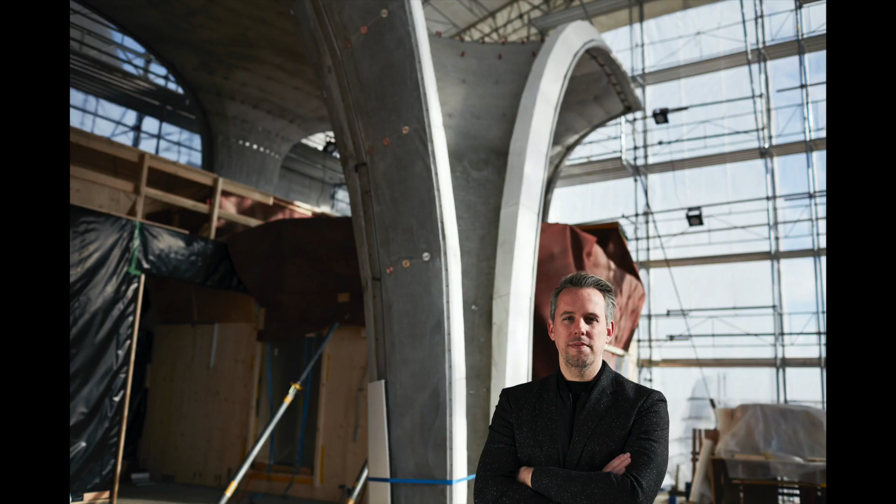Yeah, it's going to be a combination of all the above. I think what Dirk's message, and what we all try to say, is that one solution doesn't fit all, and you need to understand context, which includes social aspects and all these things indeed.

But if I may, I wanted to say one more thing to earlier: we need to shift from volume to value. Everything in the profession is around volume. Your fees are calculated on how expensive the thing is, how expensive it is related to the resources first and foremost. We have to rethink how we work together.

You mentioned this as well, that in education we have to bring people together. There is a century-long discourse that architects and engineers need to talk together. Isn't it crazy that they barely talk to each other in education, and then have to work together as a good team in practice? But additionally, we don't talk about the real bottlenecks in construction, in building, in actually proactively thinking of separating materials, making them separable. So education is a total bottleneck.

This fee structure is a total bottleneck. Liability is a total bottleneck, that we pass on responsibilities to the other. So there are so many bottlenecks. We really need to restart, and that is why at ETH I'm increasingly vocal that I think I need to start a new department and just kind of start hiring from scratch.